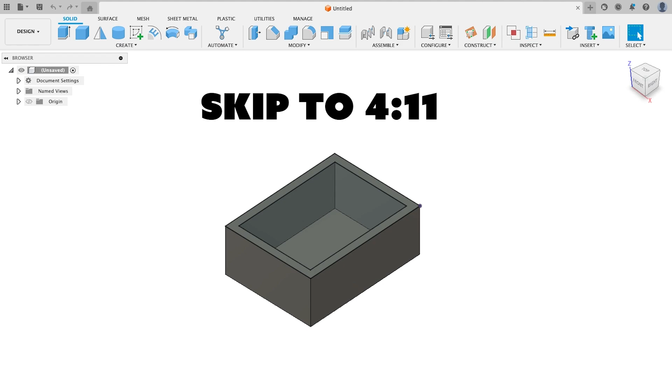The first portion of this video is creating an empty shell to put the tabs on. Experienced modelers will probably want to jump to 4 minutes and 11 seconds, since there's not much to making half of a hollow box. Our first step is to draw a two-dimensional sketch of our container viewed from the top. We'll select Create, then Sketch, and click on the top plane.

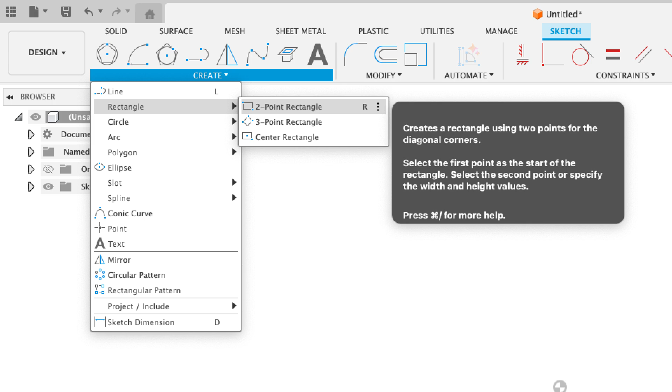Now that we're in the sketch view, we'll draw a rectangle that represents the overall size of our container. The shortcut for this is R, or you can select Create, Rectangle, and two-point rectangle. Click once at the sketch origin to start the rectangle, and then click a second time to set the rectangle's opposite corner. The blue lines indicate that the rectangle isn't fully defined yet.

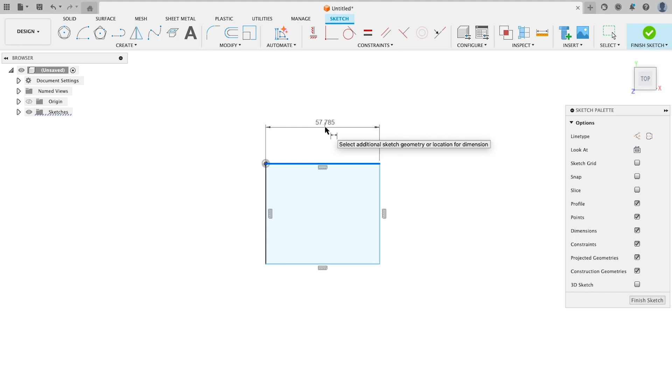Let's give it some precise measurements using the Dimension tool. Click D to open the Dimension tool, and then click the top of the rectangle to give it a specific width. For this example, I'll make the container 80 millimeters wide. Now we'll repeat that for the side of the box. Let's go with 60 millimeters.

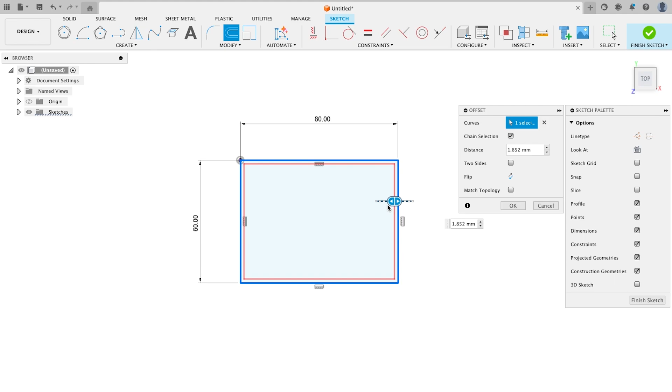Next, we're going to draw a smaller inset rectangle that establishes the container's interior space. To do that, let's click O for the Offset tool. Now we'll click our first rectangle and set the offset to 4.8 millimeters. That sounds absurdly thick for a 3D printed wall, but it'll make sense in the end. Let's exit the sketch by clicking Finish Sketch and start building our box.

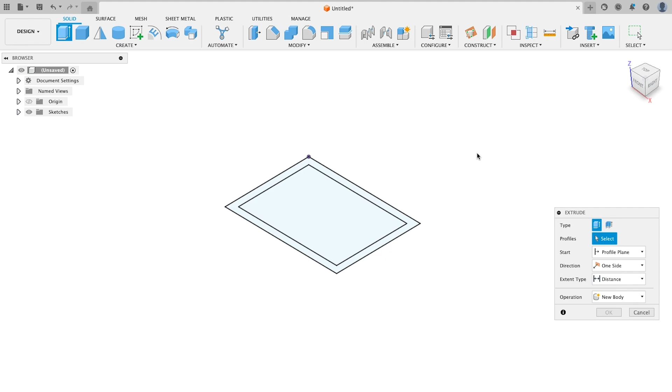To create the box walls, we'll use the Extrude tool, which you can get to with the shortcut E, or through the Create menu. We'll select the space between our two rectangles and pull this area down. I'm going to make this wall 30 millimeters deep. Once we hit OK, Fusion will create the wall and helpfully auto-hide the sketch we were using. Well, that's helpful sometimes, but we still need that sketch. So I'll go over to the Sketches panel and turn our sketch back on.

If this feature annoys you as much as it bugs me, here's a bonus tip that even regular Fusion users might like. Go to your Preferences panel and turn off Auto Hide Sketch on Feature Creation. There, now Fusion won't auto-hide our sketches, and we can get back to work.

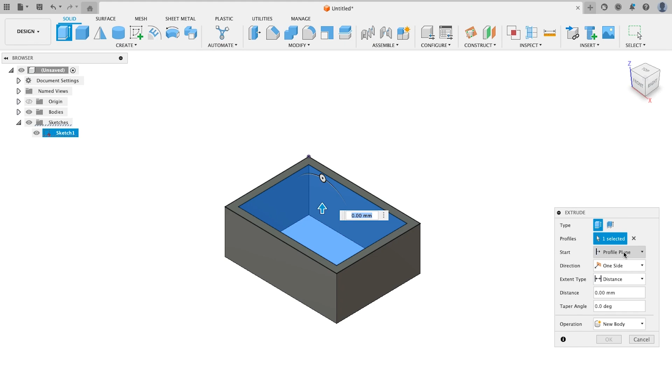This box needs a bottom, so let's bring up the Extrude tool again with E and select just the center of the sketch. In the Extrude panel, we can set both the height of the extrusion and its starting point. I want the bottom of the box to be on the bottom, so let's set the start point to Offset and give it an offset of -30 millimeters. That's the same height as the box wall.

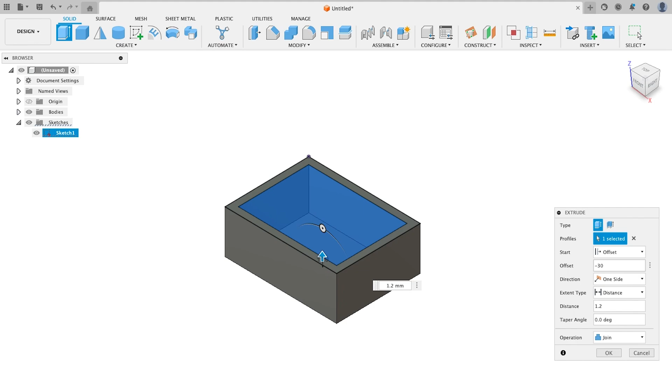Now for the extrusion distance, I'll enter 1.2 millimeters. 1.2 millimeters works well for those printing in either 0.2 or 0.3 layer heights, so I use this value often when designing flat surfaces. Hit OK, and we finally have one half of the box.

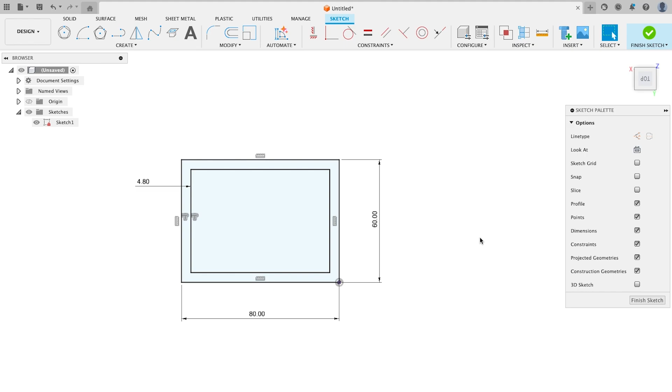Welcome back to those who jumped ahead to the tab portion of the video. You got here just in time. First, we need to define where the tabs will be around the edge of the box. Let's right-click on our original sketch and select Edit Sketch. The tabs are half the thickness of our container wall, so we'll bring up the Offset tool again with O and create a new inset rectangle that divides our 4.8 millimeter outer wall into two 2.4 millimeter halves.

Now we need to draw some lines that will define where the tabs start and stop on each edge of the container. Click L to bring up the Line tool and draw 3 horizontal lines that run all the way across the width of the container. Then draw 3 vertical lines.

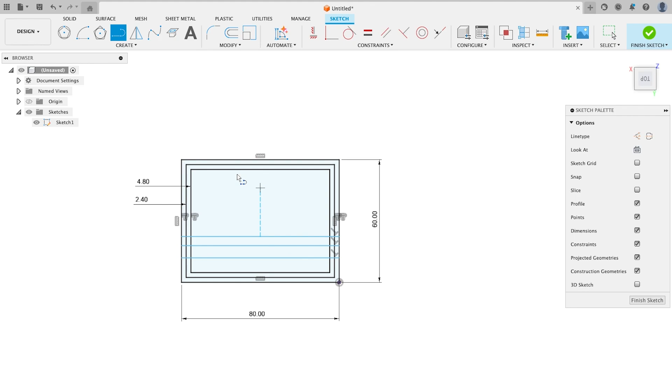Chances are Fusion will automatically detect that you were drawing lines that were perpendicular to the sides of the container. If it did, you'll see these small perpendicular constraint icons near the start of your lines. If Fusion failed to do this automatically, you can use the perpendicular tool in the constraints menu to force these lines to be perpendicular. Now we need to define the position of these lines.

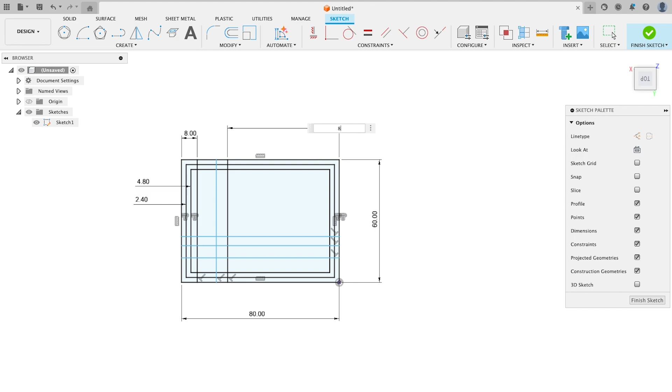Using the dimension tool with the shortcut D, I'll set both of the outer vertical lines to be 8 mm inset from the container's edge. We need the middle vertical line to run perfectly down the center of the container. We could use the dimension tool for that as well, but I'm going to go back to the constraints menu and select the midpoint tool.

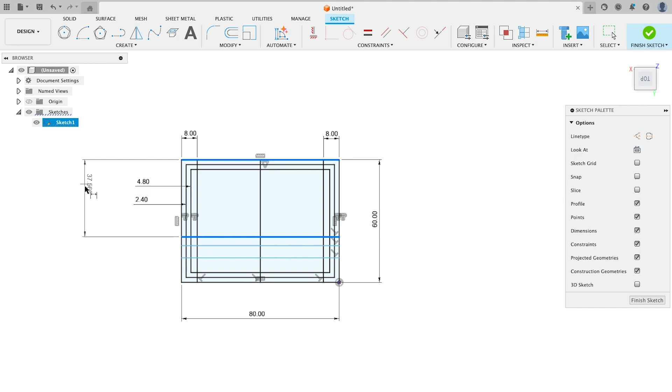With this, I can specify that the end of this line falls on the midpoint of the top of the container. Now we'll repeat this process with the horizontal lines. We can finally click Finish Sketch and make some sense out of these new lines.

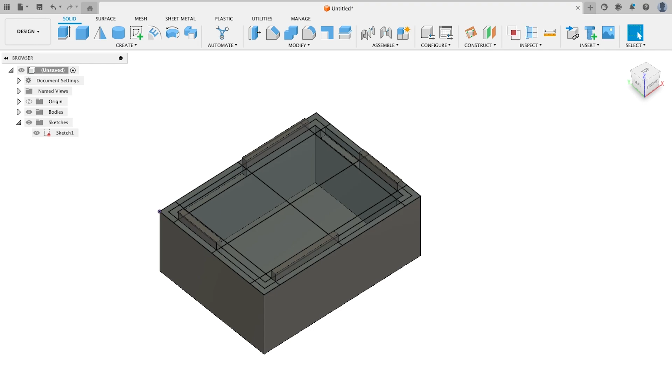Bring up the Extrude tool by clicking E, and then select the areas that will become our 4 raised tabs. Enter 4 mm for the extrude height and hit OK. Now we need to create the grooves these tabs will slide into. So bring up the Extrude tool again, select the sections adjacent to our raised tabs, and enter -4 mm for the extrude height to cut a thin trench.

If you selected the correct areas for both extrude actions, you'll have half of a box that, if printed twice, could slide together to form a whole. But there are 2 immediate problems. The walls for the shell are too thick, and the tabs are relying only on friction to hold the assembly together. Let's bring back our sketch and take care of that thick wall.

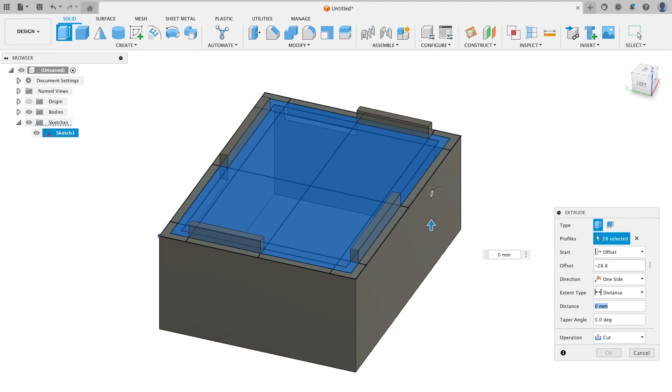Using the Extrude tool with E, we'll select everything except the outermost wall of the box. Now we'll set the start of this extrusion to offset, and give it a value of -28.8 mm. That's 30 mm for the height of the box, minus the 1.2 mm floor. Then we'll set the extrusion height to 22 mm. This cuts a nice chunk out of the box interior, leaving the thicker sections of the wall only for the area around the tabs. Speaking of tabs, we need to give them some real grip.

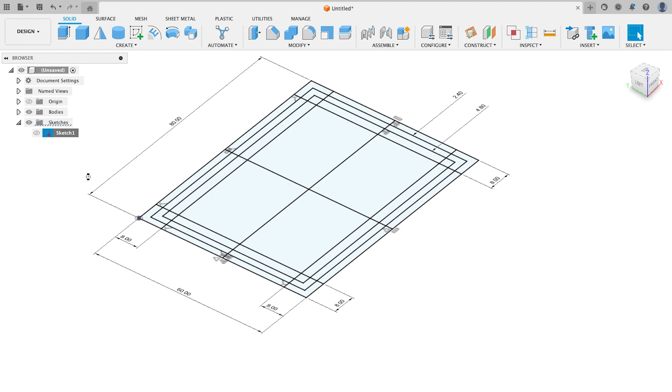Let's bring the sketch back one last time. Right-click on it and select Edit Sketch. We're going to use the Offset tool again with the shortcut O, and create a new offset rectangle from our container's edge. This rectangle should be inset 2.8 mm, just a little further in than the offset we created for the tabs. Now we'll click Finish Sketch one final time. We'll use this updated sketch to carve out some little hooks into the raised tabs.

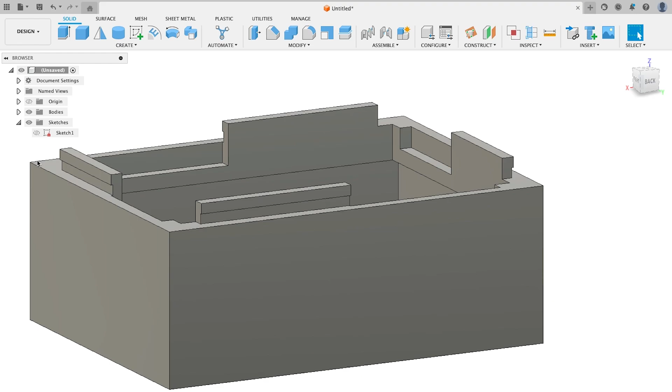Bring up the Extrusion tool with E and select the 4 sections shown. We'll extrude these profiles up by 2 mm. If that was done correctly, you'll have 4 hook-shaped tabs. We'll need to repeat this with the tab slots, this time adding a little lip to those slots to hold the hooks in. Bring up the Extrude tool and select the 4 small sections that correspond to the 4 tab slots. For this extrusion, we don't need to set up an offset value. Just extrude down 2 mm and click OK.

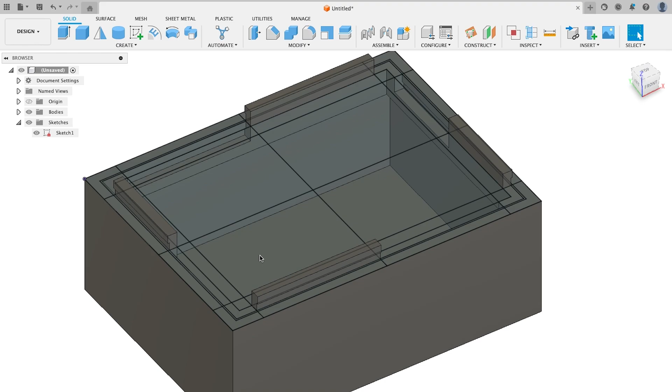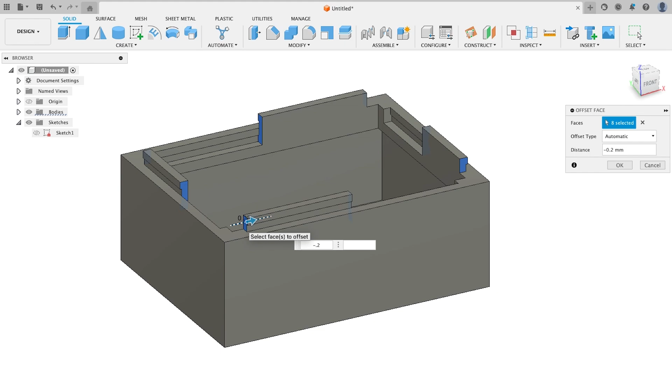Alright, we have some secure clips, but we're not quite done yet. This current design has way too many overhangs and too many tight fits. So in the next section, we're going to make this box easier to print. Let's add some clearance to the raised tabs so they can actually fit in their intended slots. For this, I'm going to use the Press Pull tool, which is in the Modify menu. We'll select both sides of all 4 raised tabs and inset them by -0.2 mm. Make sure that you're actually pushing these surfaces in. If you make the tabs wider, they're not going to fit at all.

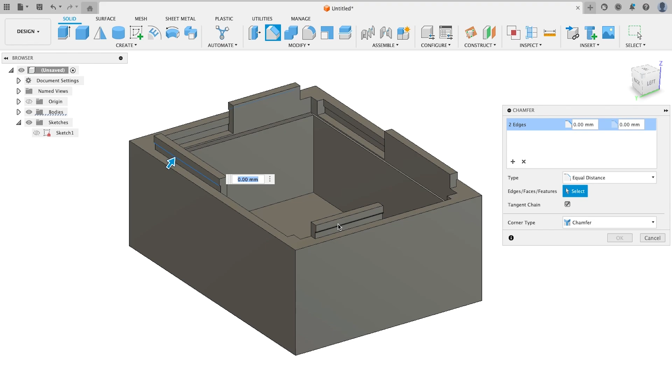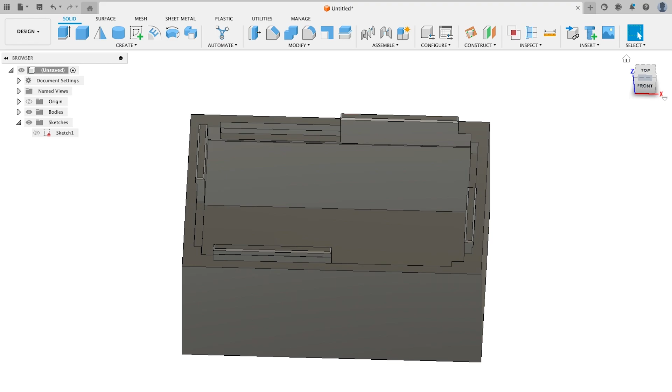Next, let's take care of some overhangs using the Chamfer tool in the Modify menu. The interior ridge of our box is a nasty 2.4 mm overhang, so we'll select all these edges and give them a matching 2.4 mm chamfer. Let's repeat that step with the 0.4 mm overhangs under the 4 raised tab hooks. And we'll do that again with the 0.4 mm overhangs above the tab slots. The chamfer tool can also help us make the tabs a little easier to handle. Let's select the top surface of our 4 raised tabs and give those a 0.4 mm chamfer as well. This will help guide the tabs into their designated slots and give the assembler just a little extra wiggle room.

Last but not least, I'm going to throw in some purely cosmetic tweaks. A 2.4 mm fillet will help round out those sharp corners. A 0.4 mm chamfer around the bottom edge will help compensate for printers that excessively squash their first layers. Inside the box, I'll add a 1 mm chamfer along the base of the wall. This helps with common printing artifacts that pop up around sudden floor-to-wall transitions.

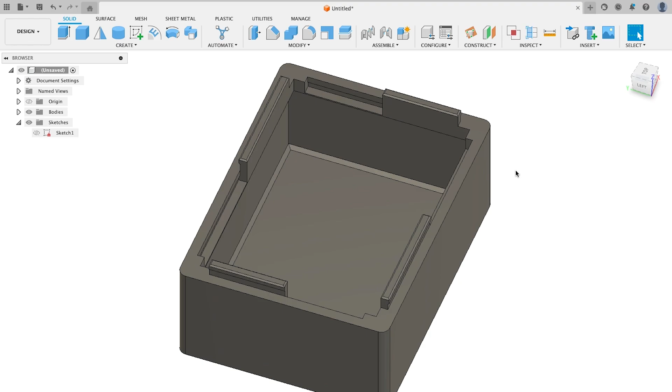Okay, this simple snap-together box is ready for the printer. One print later, and we're ready to assemble. I'll just line up one side like this, and then force the box closed. As you can see, this assembly is incredibly tight. You may need a clamp to force the halves together, and you'll definitely need tools if you want to take it apart. If you want something a little more loose, these tabs could work, but you'll need to add some extra clearance. And keep in mind that a 3D printed tab will only be able to flex so many times before it breaks off. This demo box is a little useless because I didn't even model an opening.

Well, I fell for it again. I thought I'd make a quick tutorial video for this week, and I totally forgot that they take way longer to script and edit than a normal video that includes a brand new model. Still, I hope it was useful, and if this is something that you want to see more of, definitely let me know. Otherwise, I'm only going to make tutorial videos when I totally forget how much work they are.